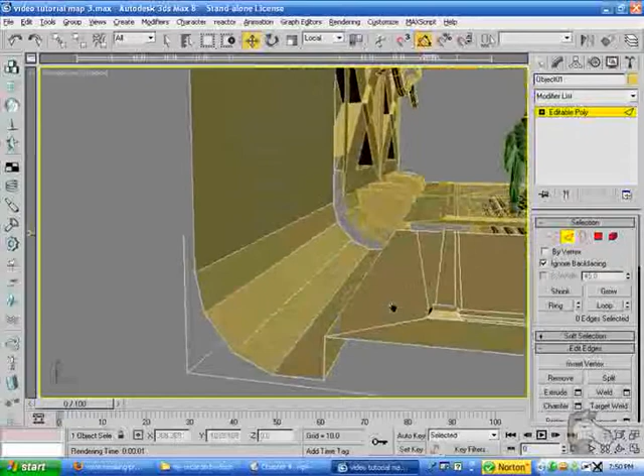And just do that by however much looks good. That should be about right. Yep, that looks pretty good. It's not exactly how it is over there on the other model, but it's pretty dang close. Alright, that looks pretty good, so let's move on to the next section.

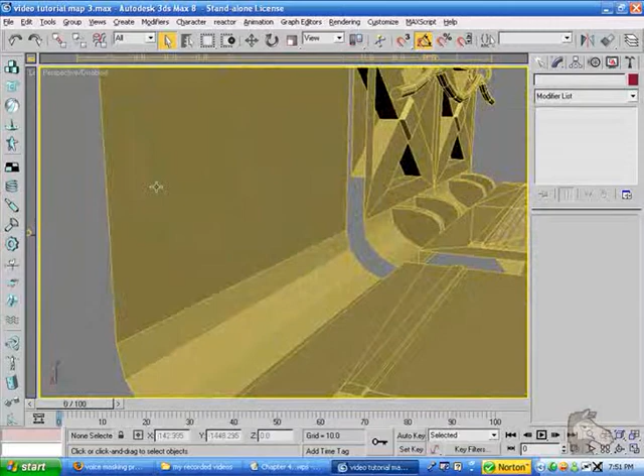What I'm going to be modeling now are these little nubs sticking out from the thing right here. So to do that, I'm going to go ahead and save real quick, and then go into edge selection mode again.

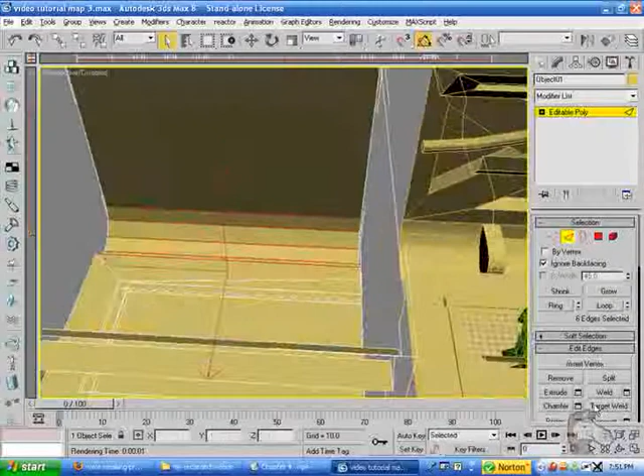Select all of these edges right here, including this one and the one right there. I'm going to go ahead and connect it 4 times. I'm going to pinch it by connecting it 4 times. Then I'm going to get out of this.

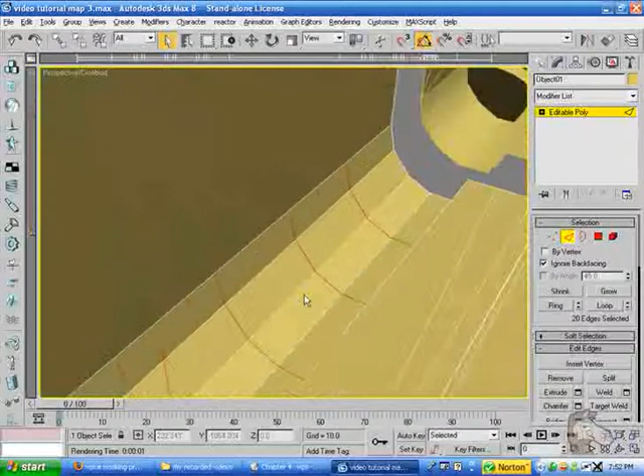And going to deselect the set of edges right here. Then I'm going to go into the scale tool and basically just scale it by... actually you can't do that with edges, I forgot. You have to go into the vertices selection mode.

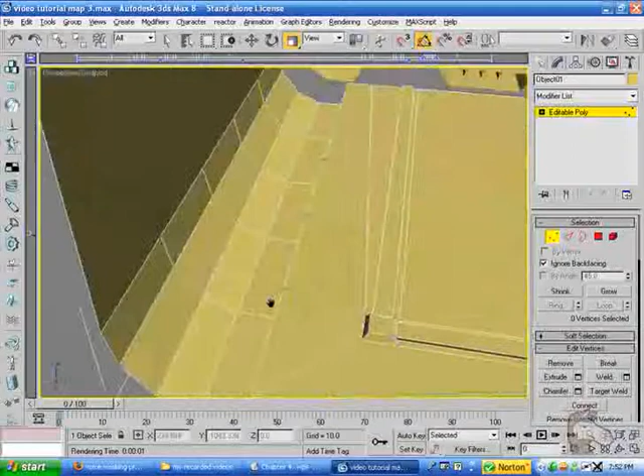Go ahead and select all those. Okay, now that I selected these, I'm going to scale it down on the x-axis until this number on the bottom left beside the x turns to 30. That will decrease it by about 70%.

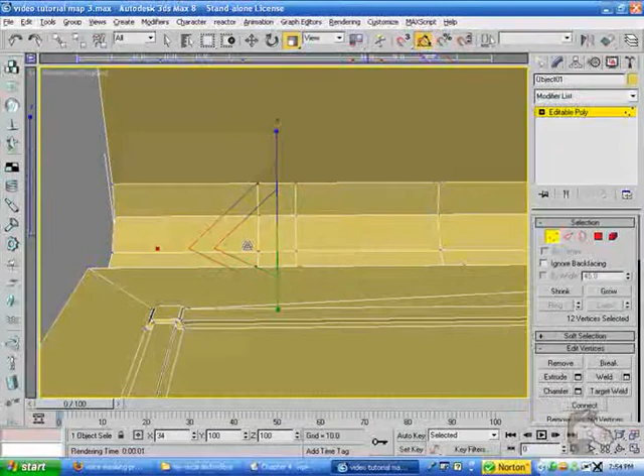Now I'm going to do the exact same thing for the vertices over here. Just go ahead and decrease it by the 70% so it turns into 30. Okay, that looks pretty good.

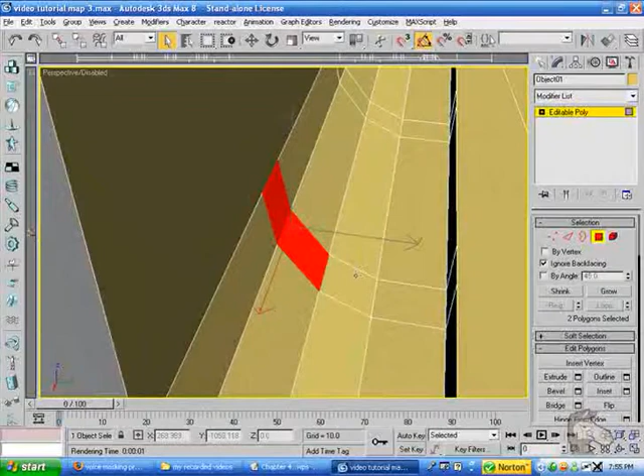Now what I'm going to do is go ahead and delete these faces that occupy the space in between the edges. Going to delete that. And the same over here.

Now I'm going to create faces to cover up this area right here. Let's go into polygon selection mode, go into create, and just create faces.

Okay, now that that's done, we have to do that curve over here because obviously this looks like crap, so we gotta fix that real quick.

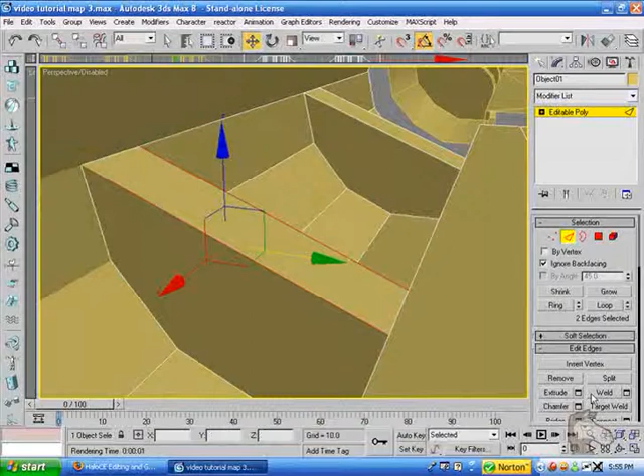Okay, and now what we're gonna go ahead and do is make this into that curvy thing over there. So go ahead and start out by connecting these 2 edges on top with 1 segment. Go ahead and copy the coordinates on the z-axis from right there, and paste it over on this new edge.

Click on the chamfer tool and do that by however much it needs it. I'm just going to do it by about that much. And then go ahead and drag it over here, just a little bit.

Go ahead and hit the chamfer tool one more time. Just kind of adjust that to how you need it.

And I'm going to go ahead and connect this thing. Actually, no, I'm going to go ahead and select that, and copy the coordinates from over here and paste it onto this edge, just so I can get it completely vertical with this floor right here. Then I'm going to go ahead and use the chamfer tool on that one edge, just by however much you need to make it look decent.

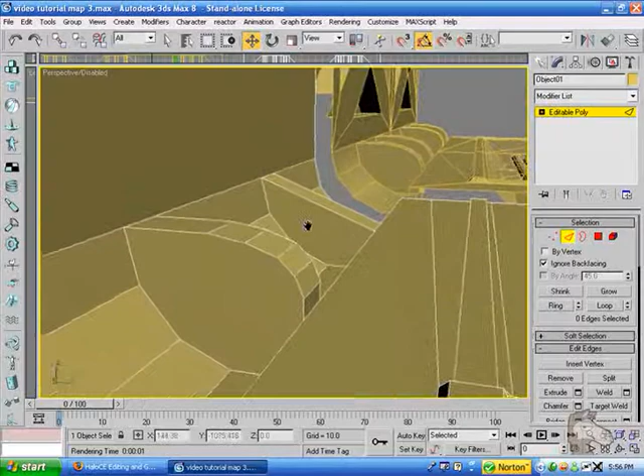And as you can see, that's a pretty quick way to make that curved edge right there. We're going to be applying some smoothing groups later on, so you could do that now or later, doesn't really matter. I'm just going to wait for now.

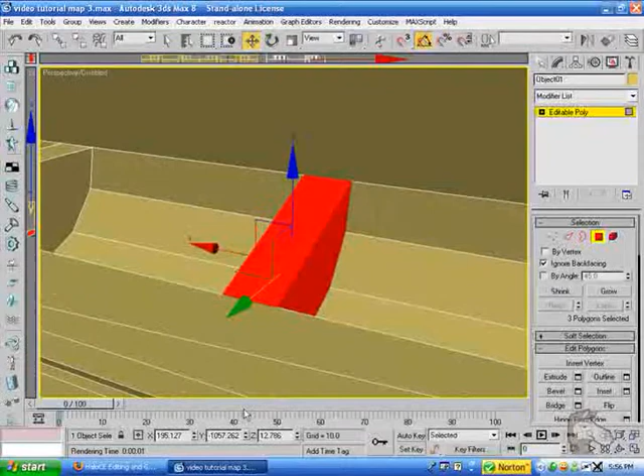So we're going to have these two nubs right here looking uniform. I'm just going to go ahead and copy this nub and place it over to where this other one is. So just go ahead and select all the faces that make this one right here, hit the copy coordinates on the x-axis, then hit the delete button.

Select all these newly created faces we just did. Go ahead and drag it out while holding down the shift key, and clone it to an element. Go ahead and paste those coordinates we took earlier back into that one space right there.

Click out of it. Go into your vertices selection mode. Uncheck ignore back facing so we can select all vertices. Go ahead and select the whole model, and go into the weld tool and weld it by a threshold of 0.1.

Once again, that will get rid of any of the open edges we have, except for the obvious edges right here.

Okay, now I'm going to go ahead and start creating this wall right here. It's actually really simple, and I'll show you how to create it pretty simply. So I'm just going to save it right here and then begin showing you how.

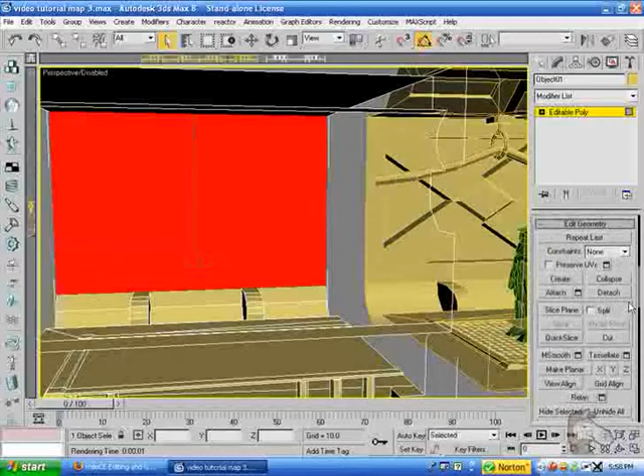Go ahead and select this wall right here, and go down and select the tessellate button. Now, a few words on tessellate. For any new modeler, or anybody who doesn't know how to use it correctly, it's pretty much the worst tool you can use. It can mess up your model in so many different ways, but it can be used for a few things.

Okay, sorry about that, my screen recorder got a little messed up there for a second, but I didn't lose anything, so that's good.

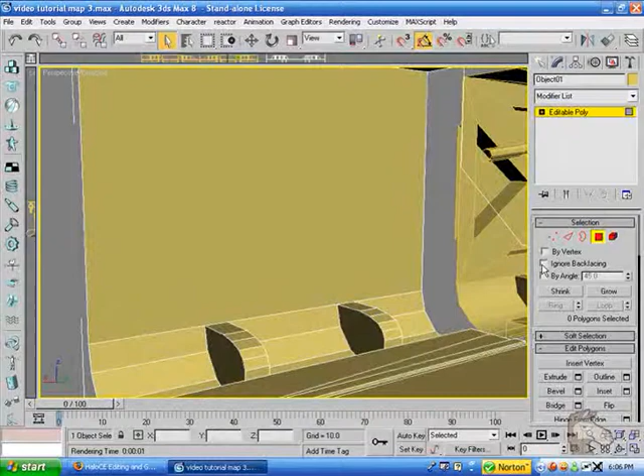Okay, go ahead and select this face, hit the tessellate button, where the box beside it is, hit the F2 key. As you can see, this isn't turning out right, because all of these lines are going to the center right here, and that's not correct.

So what we want to do is cancel and go ahead and detach this face real quick. Just going to detach it to an extra object real quick. Actually, it's not even necessary, I'm just going to detach it to an element.

So go ahead and select this face again, and what we actually want to do is hide the unselected polygons just so they're not in our way. Scroll down to hide unselected. That'll hide any polygons that aren't being selected right now.

So go ahead and just backspace all of the vertices on the bottom that aren't being used. They were being used to connect to those nubs that I created earlier, but we're going to recreate them after I fix something real quick.

So to create that cross bar pattern in the wall, go ahead and select your polygon, hit the tessellate tool once more. As you can see, it's all lining up in the center like it was supposed to. Go ahead and click OK.

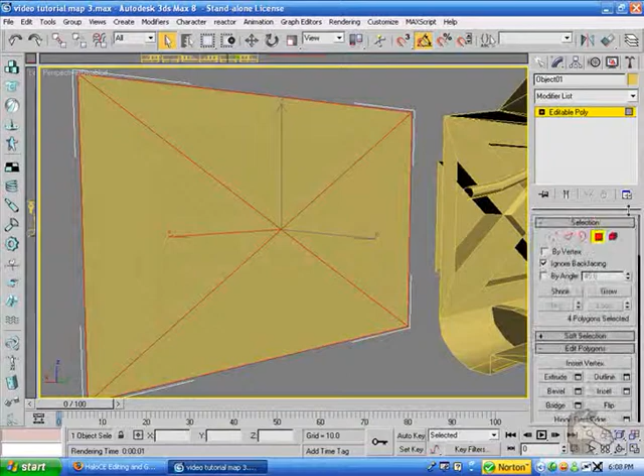You can go ahead and turn on the shaded mode now by hitting F2. Go into your inset tool and inset it by a value of about 10 units.

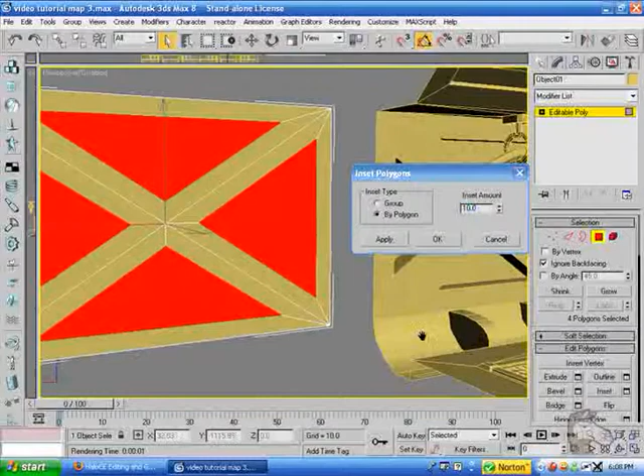Actually, I'm just trying to make this physically accurate with my other model right here. Should be something like 12.5. Actually, do it by about 15 units, and that should be good.

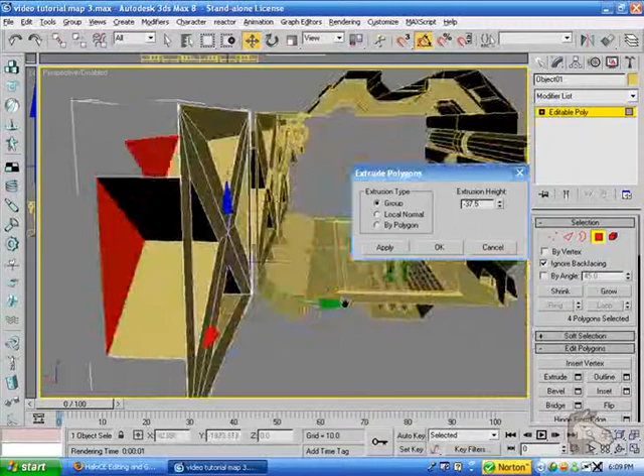So with those polygons still selected, go into your extrude tool and extrude that by negative 37.5 units. And there you go, that's an easy way to make it.

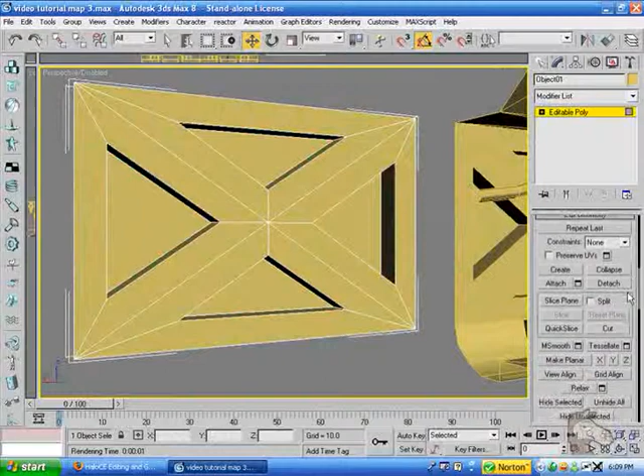Now we just have to do - actually no, one more thing. I have to replace those deleted vertices that I deleted earlier. So go ahead and go into your edge selection mode, insert vertex, and insert vertices here, here, here, and here.

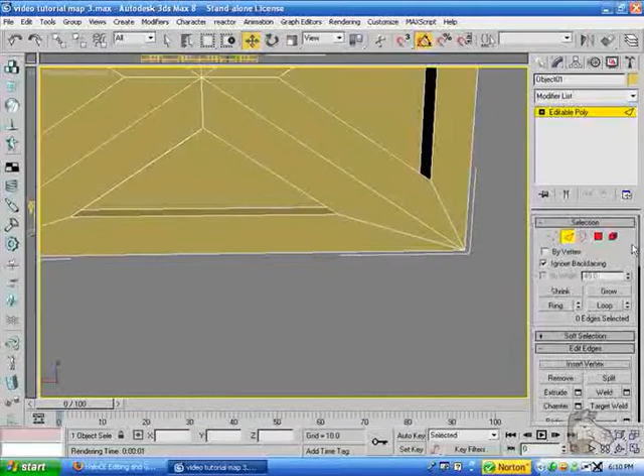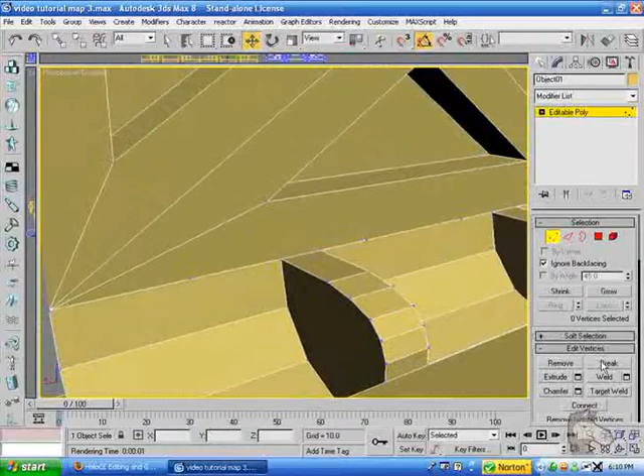Now we can go ahead and unhide all those other polygons. Now what we're going to do is simply reattach this to this thing right here, because I detached it earlier when I did that detach thing. So go ahead and target weld these new vertices to the old ones.

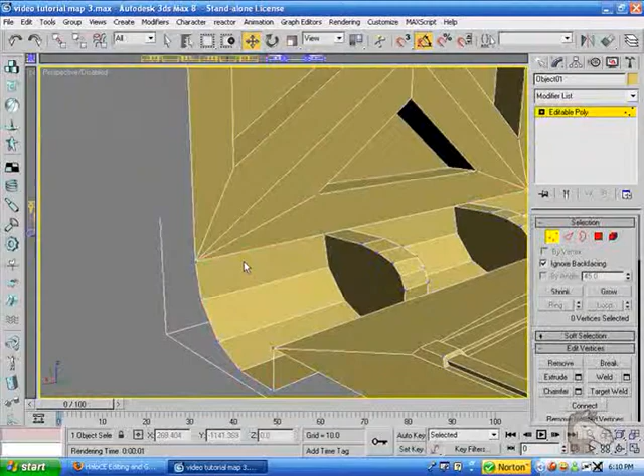Just to do a check, go into your border tool and select everything. As we can see, there's still an error right there, but I know exactly what I did wrong. Just to fix that real quick, I'm going to go ahead and select every vertex, go into the weld tool, and weld it by a threshold of 0.1. Recheck everything, and as you can see, that fixed it. Everything looks fine right here.

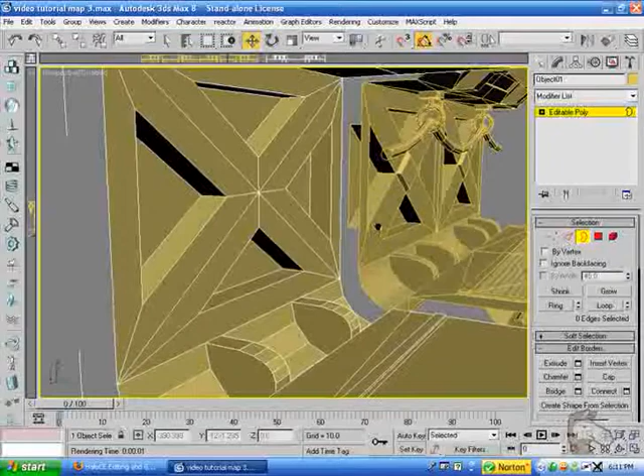Alright then. Now I'm going to clean up this wall. To do that, I'm going to select this center vertex, hit the backspace key, and I'm just going to make numerous cuts in the model to clean up everything. Not really cuts, just create new edges.

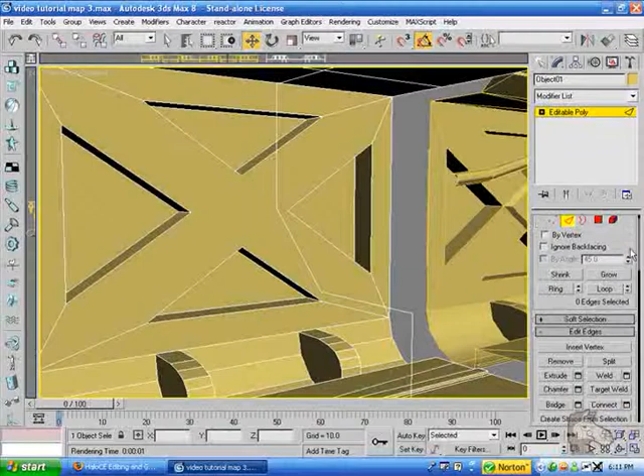So go into your edge selection mode, go into the create button, and just create them like this, just to clean up everything. That looks pretty good.

Select this new polygon in the center right here. Go into your bevel tool. Okay, so go ahead and extrude it by 3 units and outline it by 3 units also, or negative 3 units, that is.

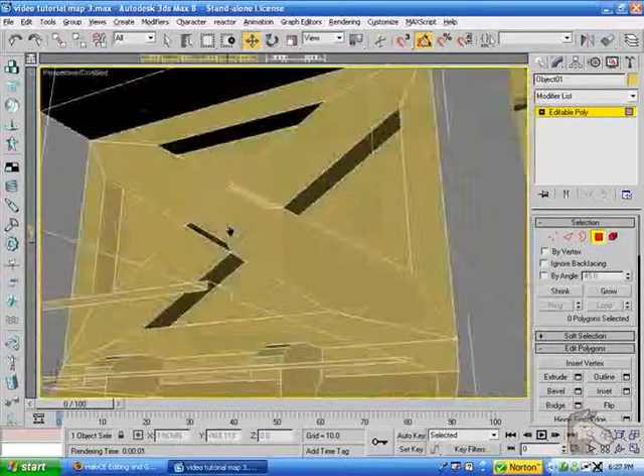There you go, you created this wall fairly easily. There are a lot more complicated ways to do it, but this way is obviously the fastest.

Okay, now what we're going to go ahead and do is create this draping wire thing with the hooks connected to this top right here.

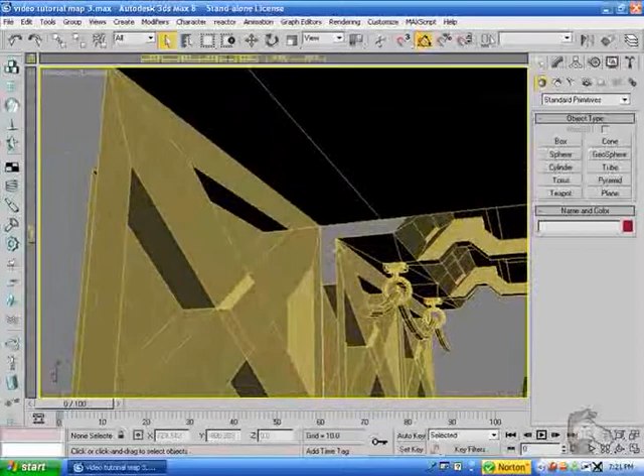To do that, I'm going to go ahead and create a new shape with a square, or rectangle that is. Just create it over here.

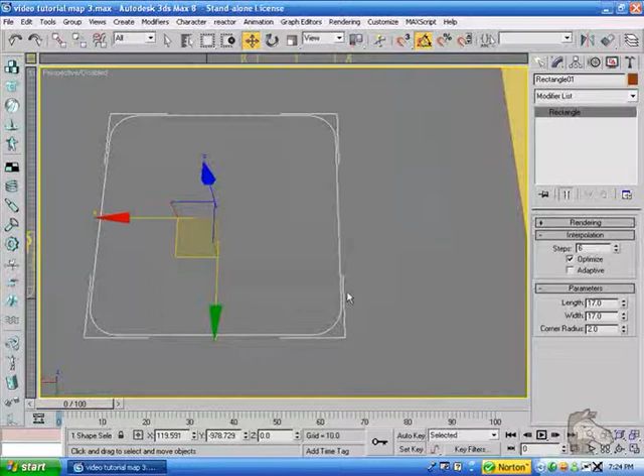Alright, give it dimensions, length 17 by 17, with a corner radius of 2. And go ahead and get rid of those rounded edges right there. I'm going to go into interpolation and just turn that down to 0.